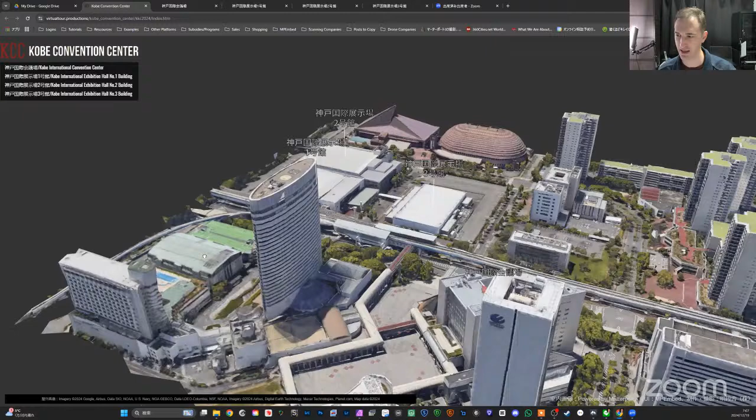Yes, I think this is one of the things that helped the people at the convention center make the decision to go with Meidanta's offer as opposed to other businesses, because there was competition for this particular job. We'll talk about that.

If you just assume I'm trying to bring my convention to an international convention, I'm just curious about the Kobe Convention Center and its capabilities here.

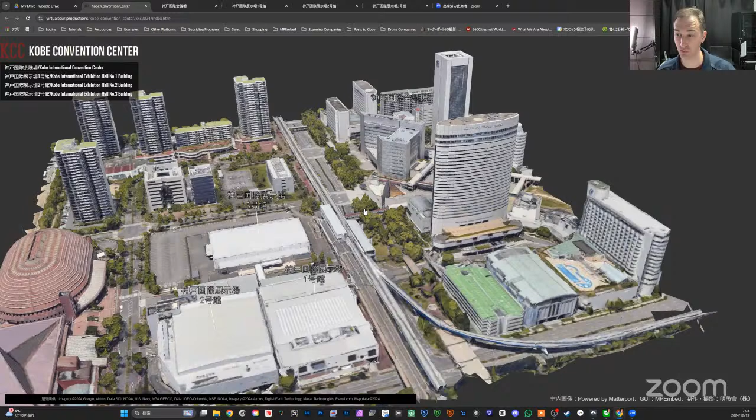Sure. So people who open this, it's intended as a landing page, can open it and then move it around if they want to. But really, it's just intended as a landing page. From here, they can press any of these 4 buttons, or click the Japanese writing at the top of these markers, which you can see stay anchored.

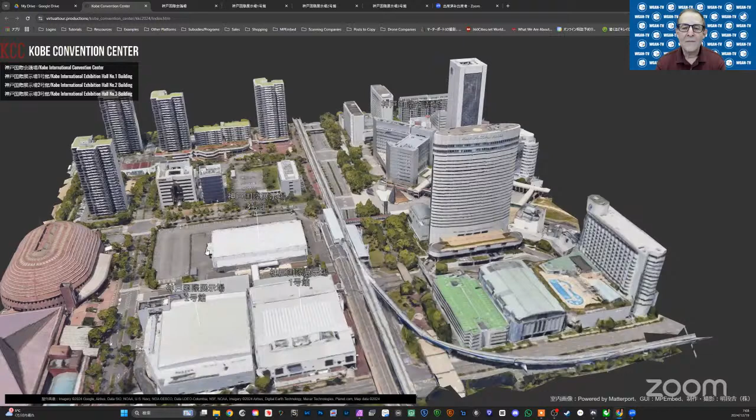I've prepared ahead of time the links. So if we open one of them, let's say this one, it would display something like this. This is the Kobe International Convention Center.

We're starting actually from the top floor at the request of the client. If we zoom back out into what Matterport calls the dollhouse mode, you can see we can do the same kind of functionality as with the overall exterior scene, except now you can see the inside of the building.

So we can break this up to see separate floors. Starting from the basement floor, you can see the theater I mentioned earlier, and other floors appear half faded out, but we can zoom in particularly. Can we take a look at those spaces, the theater? Sure, let's go to the theater.

So if we enter the theater by double clicking, we can now see from the audience's view what the theater looks like, and also the view of the screen. And if we dive to the front, we can actually see from the people on stage what they would see here. Obviously, the lights are very bright, so it does cause some lens flaring with the camera we used.

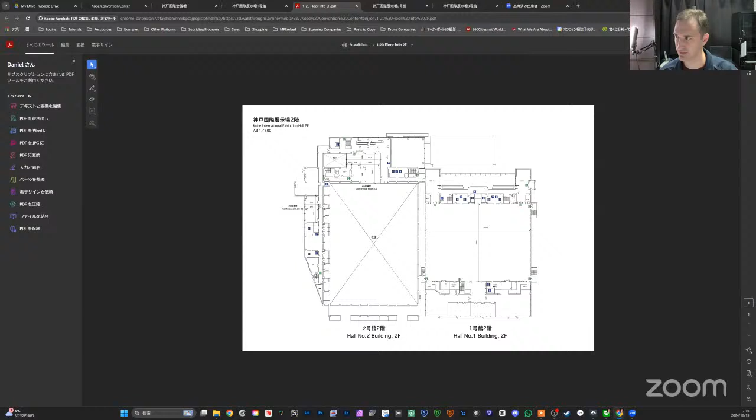And the exhibition hall features the same kind of functionality. How many exhibition halls, expo spaces are there within the three buildings? Is that literally just three, very large? So from memory, this is the first exhibition hall.

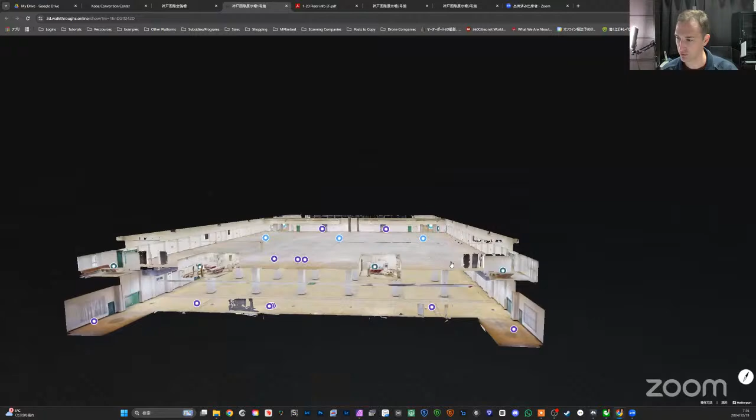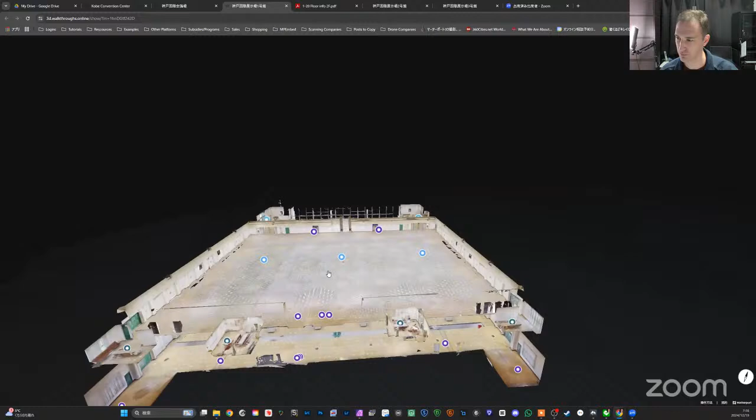It has two exhibition spaces. So you can see here, when we look at it in 3D, the ground floor is here, two roughly the same sized exhibition spaces. The one on the ground floor has a much higher ceiling, about close to 15, 20 meters I think, and it's supported by these large concrete columns, whereas the second floor is completely open. The ceiling is a bit lower.

You saw the second floor just now. If we just give you a quick look at the first floor, it's like this.

Then in the other two exhibition halls, there is one large exhibition space each. The second hall is the largest of all of them. We'll just give you a look at that. You can see that this floor space is massive. This is the largest space of all of the buildings that I scanned in this complex.

The echo in there is pretty amazing. If there is nothing going on in there, no chairs or anything placed, it echoes about 5 or 6 times. So the third hall is a newer but smaller hall, but still nonetheless very big.

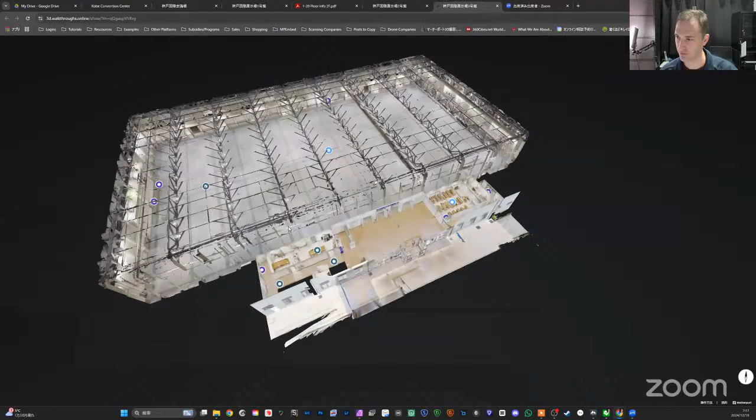This is the final space. You can just see by the number of lights that we're talking at least 30 meters across by about 70 or 80 meters wide, I think, just from memory.

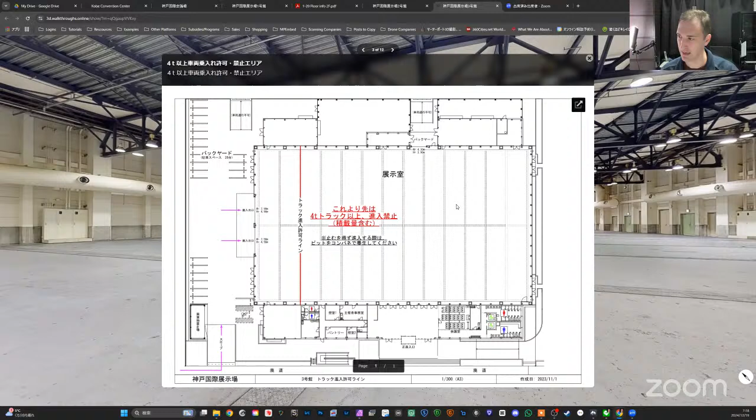Is there a floor plan for this space? Yeah, the floor plan - if we talk slightly from a specialist point of view - initially I tried to include this floor plan as the background map here that you see, but there were some issues with the size of the space's exterior and the size of the floor plan to make that a little bit difficult. We'll talk about that in a moment.

Can I see where the loading bays are? Sure, this one has very large loading bays, so we can see what the exterior looks like by clicking one of these tags, and then we get this view, the loading bay area.

Actually, there's an interesting story behind this photograph, but do we have time for it? I'm not sure. We'll come back.

Is there anything else about the space itself, about the Kobe Convention Center? We've looked at expo halls, classrooms, the foyers into the spaces, and the overview of all 4 buildings. Before we take it off screen share and talk about the project, is there anything else to show in terms of the space? In terms of the space, I've shown 3 functionalities, which I hoped people would pick up on. One was the exterior, like this.

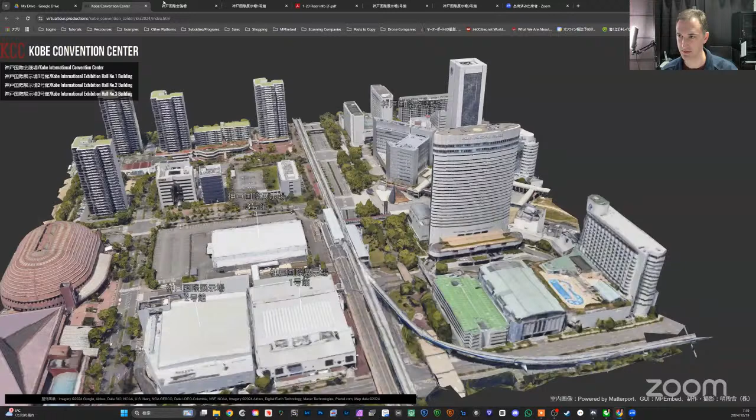People are much more familiar with the Matterport interiors. Let's take it off screen share and talk about the project.

Cool, thank you. We're ready to book our 50,000 attendees and expo. Who do I need to talk to? I would put you in touch with the Kobe Convention Center management team, and I think you'll find our tour and a lot of information on their website about that.

Thank you. So what has been the reaction? This is 400,000 square feet. I believe you did this project, available publicly, in April 2024. That's correct. What's been the reaction of the Kobe Convention Center team?

In the lead up to this interview, I actually asked them in detail about these things. As I expected, they were very happy with what they got from the tour. But importantly, not just the people from the management team, but also the people on the ground who use the tour are also finding it very useful for assisting in their daily work there.

I imagine there are many different use cases of this tour. Can you talk about that?

Sure. Initially, what they were looking for was the ability for people remote to be able to see what the facilities are like, so they could grasp the size and the amenities available, that sort of thing.

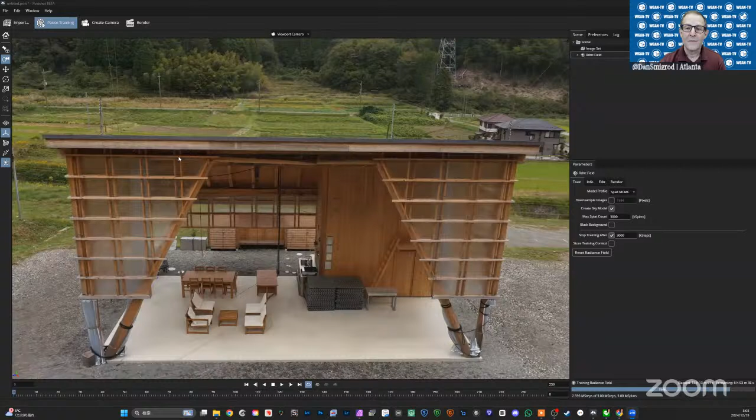Because of time constraints, I'll just show you what is currently loading, actually processing at the moment. You can see at the right bottom, this scan is still being made as such. It's using AI, so it's being trained at the moment. This is far from perfect, but I would love to try something like this with my client's work. The movement is a little bit rough at the moment because it's still being processed, but this is 3D Gaussian splatting, and I hear that my provider, 3D Vista, is now able to use 3D Gaussian splatting. So we could use something like this, maybe at a slightly lower resolution, to show our clients' exteriors. And this would be something that not a lot of other places are actually able to do at the moment.

That's correct. Somehow your screen is frozen on me, Daniel. So I know you're still there and I can hear you. Just know your screen's frozen.